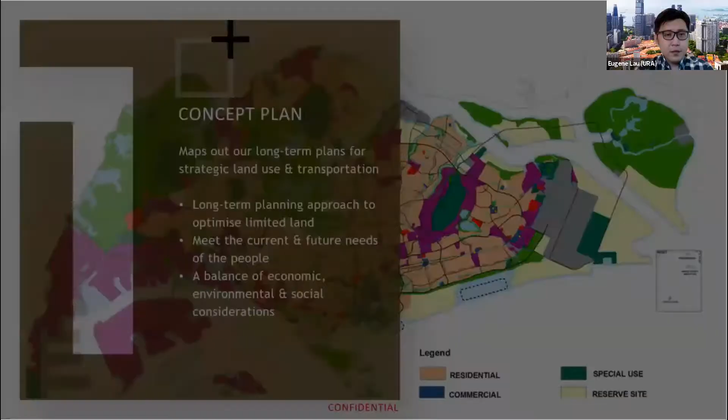First and foremost, the concept plan. Through many years of careful planning and execution, we have been able to seek out new solutions to address our limited land and physical challenges. The first process we use is called the concept plan, which is a long-term and very strategic forward-looking plan that plans almost 40 to 50 years ahead of the horizon.

We review this every 10 years. If you look at the plan itself, you'll see that the colors on the plan, compared to the master plan for those familiar with that, are actually not that multicolored. It only focuses on main colors like purple for industry, beige for residential development, green for nature reserves, and blue for commercial.

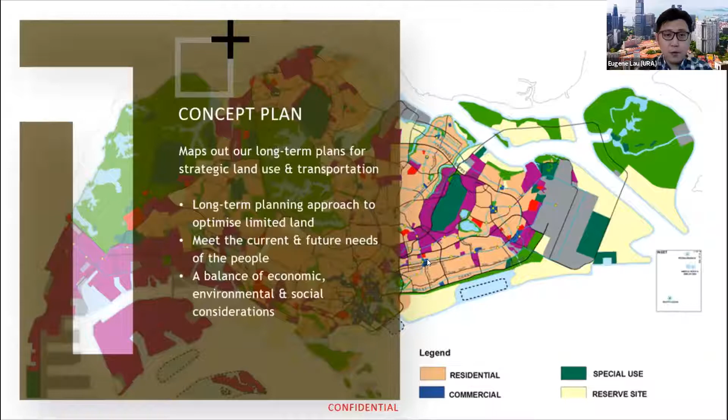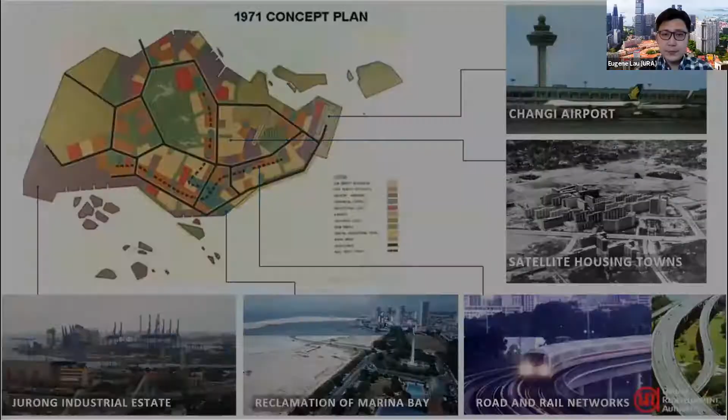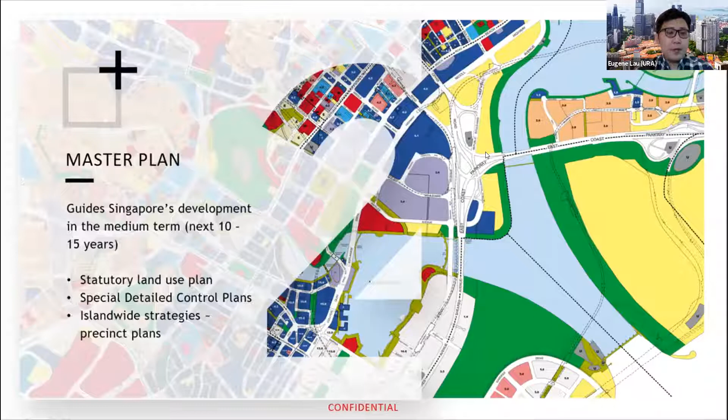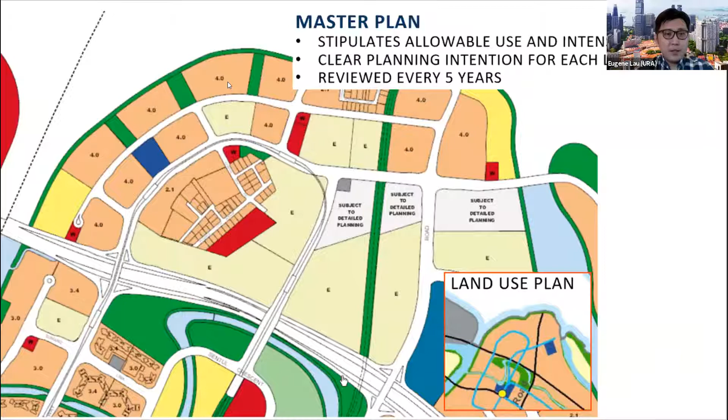I've zoomed in even further into an area in Punggol, in the northeast of Singapore. On the master plan, there are numbers we call the plot ratio, or in other countries, the FAR. This helps developers understand our guidelines clearly, and it's fully transparent. The numbers stipulate the intensity that can be built on the parcel, and the colors stipulate the type of land use allowed within the parcel.

Every 5 years, we review the master plan. We do a massive engagement exercise with stakeholders, then hold an exhibition, and gazette it after.

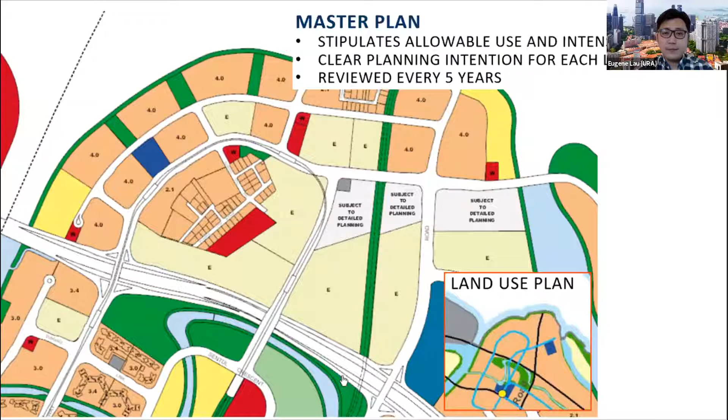Last but not least, planning itself is a multi-agency approach. Through the whole planning and implementation process, from the concept plan to the master plan and then to land sales, we have to work with many different agencies, including SLA, JTC, HDB, and so on. This integrated planning approach helps us obtain buy-in and cooperation from many different agencies, because URA alone cannot do everything to make plans realized.

Next, the urban design plan. What exactly is an urban design plan? I get this question very often. In summary, the urban design plan is an even further zoom-in on the planning work we do, focusing on layers like building form, building height plan, public space allocation, the green and blue network meaning the allocation of water bodies and parks, and pedestrian connectivity.

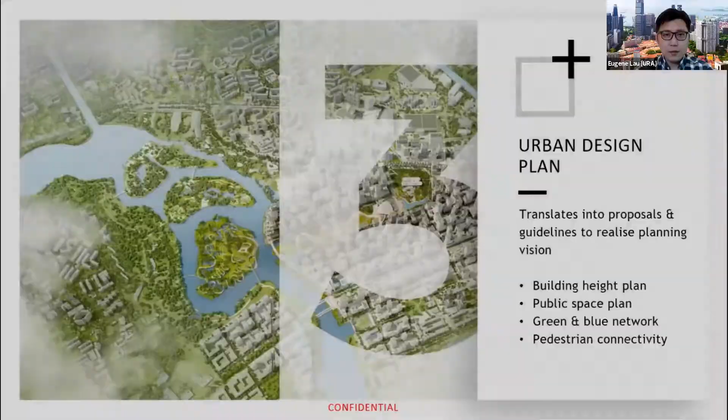Last but not least, design review of developments. URA itself is the planning authority of Singapore, a statutory board, and therefore we review submissions that come into us for approval.

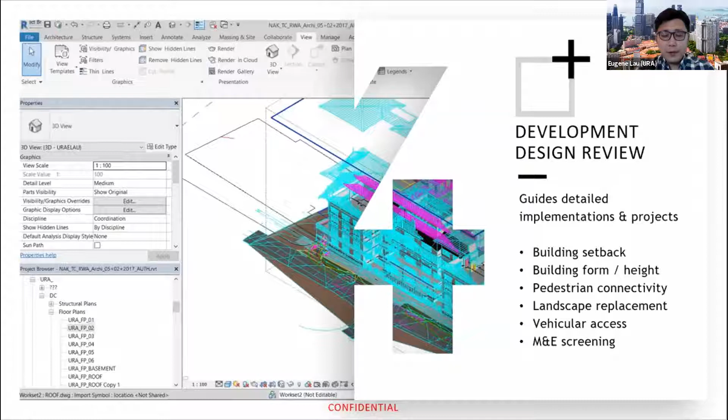In the past, we used to do so using 2D and 3D submissions, like CAD plans, and even 3D submissions done in various formats like SketchUp. But nowadays, we are moving forward to the submission of Building Information Model, BIM files, and we now use that for our design review because it's more efficient to work with developers reviewing files that they can also use for construction later on.

URA also sells land for the state. In fact, we are not the only statutory board that does so. HDB also does it, along with JTC.

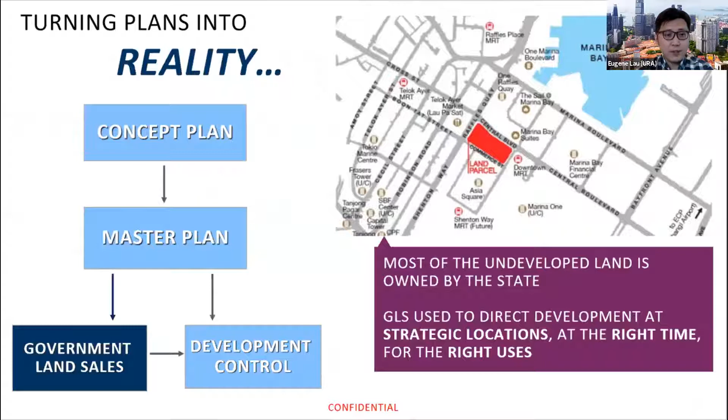With development control, there are very clear, transparent guidelines so that developers who want to build something on a piece of land know that there are certain requirements they have to adhere to, like building setback or floor-to-floor height control. So you cannot just build whatever you want on a piece of land, even if you have bid for it and won it.

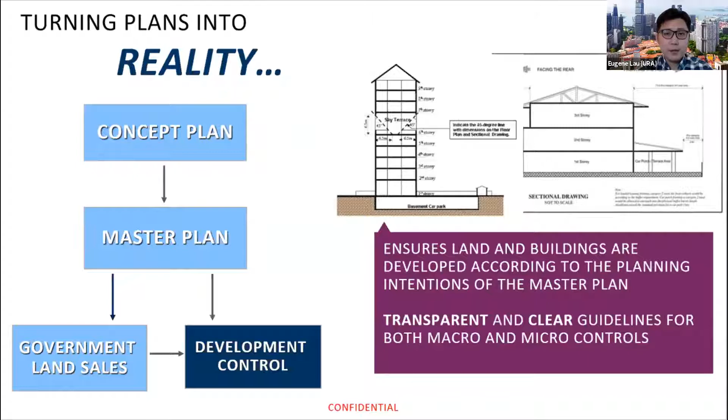So what is urban design? Urban design plays a very important part in the sculpting of the city. I often say urban design is essentially an art and a science, because it's not just design—it's quantifiable design.

We create memorable places for people. For example, as a Singaporean, if you go down to Gardens by the Bay and spend a day there with your family, it's a memorable day for you, and you remember the moments spent at the bay itself, like Countdown or National Day Parade.

Sculpting the urban form of the city: if you've been to Marina Bay, you realize there's a whole array of tall skyscrapers surrounding lower buildings around the bay, so that when you walk around, you do not feel too imposed upon by the skyscrapers looking down at you.

Activating the spaces between them—I'm referring to public spaces like Gardens by the Bay, and even the promenade around the bay. It's important to have all this breathing space in between buildings.

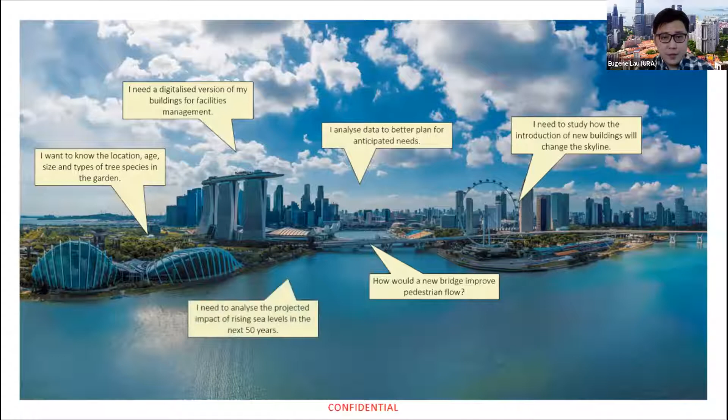So in order to ensure efficient design, we have resorted to building a digital twin of Singapore. Many agencies have done so, including SLA, which has built a digital twin of Singapore, and URA has also done another version that we will share more information on later. This is important because with the rapid evolution of technology, planners need all this data, whether 2D or 3D, to help us plan better and plan smarter.

In the next few segments, I will share with you some case studies of how URA utilizes digital twin technology to improve our planning efforts.

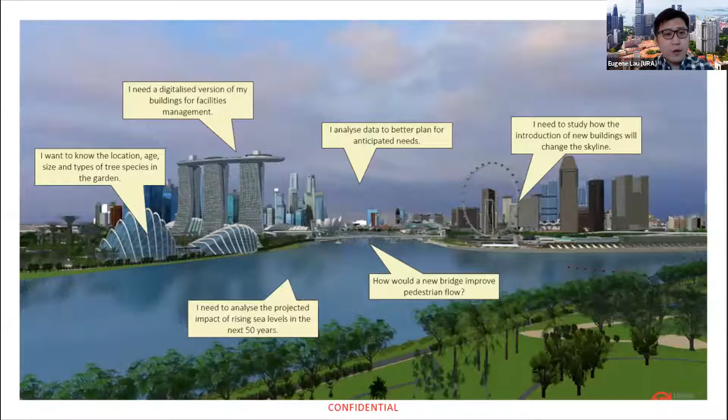Digital data within URA exists in many different formats: 2D and 3D, GIS data and 3D data. Nowadays the line between both is starting to blur, because we have 3D GIS data as well. What I'm trying to highlight is that all this data works hand in hand—whether internal data within URA, external data from external parties, or 3D data. More often than not, to have more complex simulations and analytics, you need to overlay all these different layers in order to get interesting outcomes.

As I just highlighted, there are many different processes in the planning process of URA. The next segment I'm going to touch on relates to the concept plan, master plan, and the urban design process. Firstly, the data we use in URA comes in different kinds of fidelity that I would like to call the level of detail.

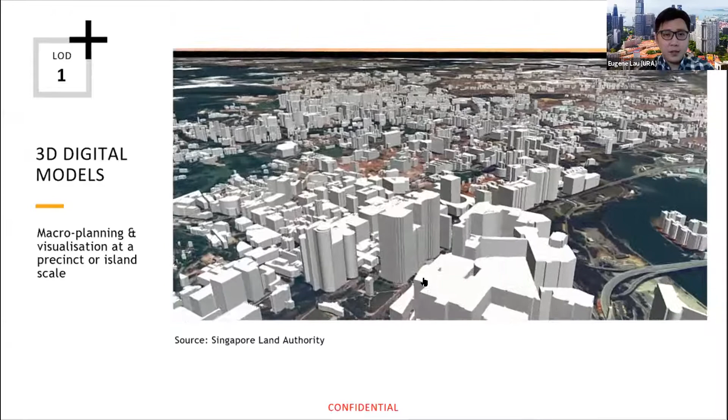For LOD1, this actually belongs to SLA. They do share their data with us, which is very useful, because more often than not, we do planning and require different fidelities of 3D data. We do not always need high resolution 3D data, and this resolution is actually very useful because it's lightweight and easily navigable.

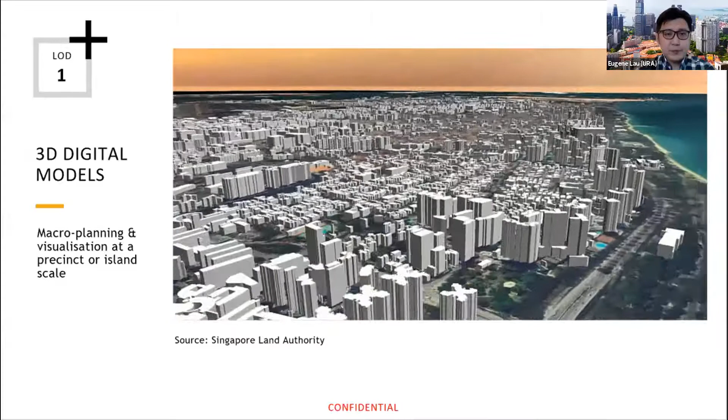This LOD2 data set is also obtained from SLA, who shared it with us. We use this with an internal software that we have in URA called the 3D Urban Planner Pro for simulation work. So what I'm doing over here is trying to simulate new developments within Marina Bay.

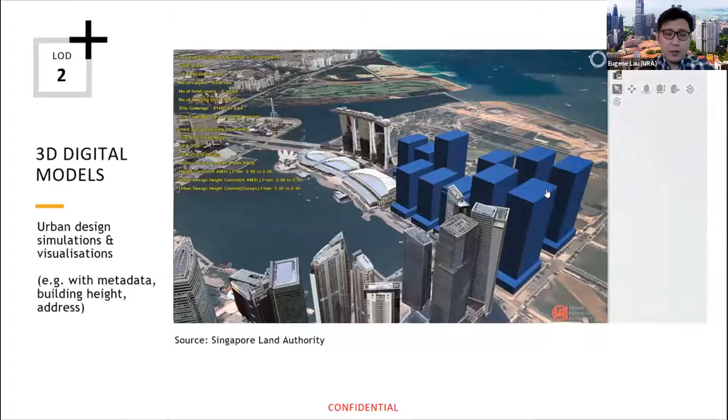Let's say in the future I have new building blocks like this, the ones colored in blue. I would like to check how this building block would impact, for example, the urban form of Marina Bay, and how it would change the view along a road in Marina Bay to, let's say, MBS or to the flyer.

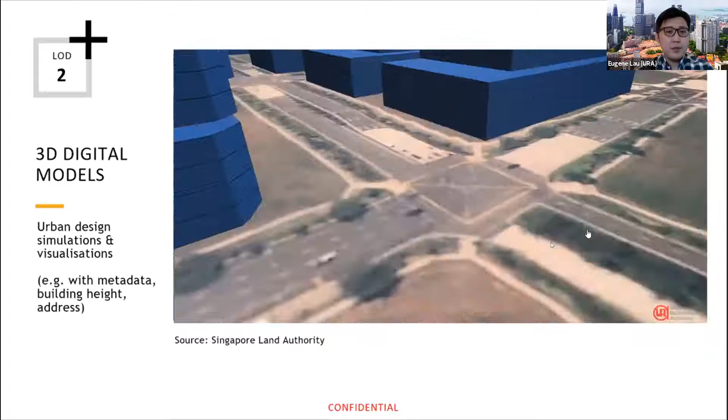You can see that I can even fly down to the street level to ensure that there is a clear view corridor along, let's say, I think this should be Bayfront Avenue, yep, that you can see MBS, even with these new developments.

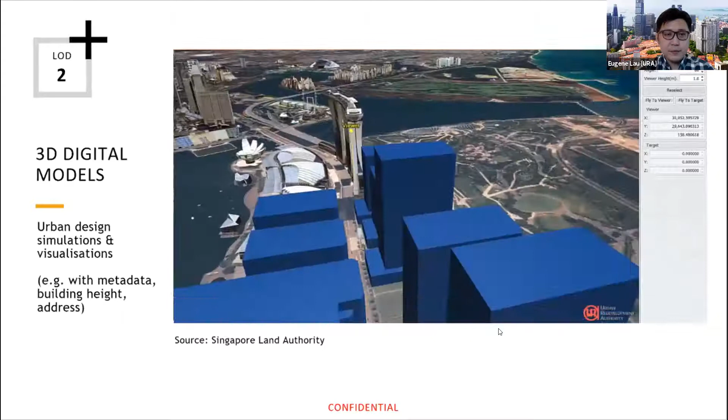The third type of model that we have in URA are the LOD3 models, which we have commissioned a 3D modeler to build over a couple of years. This is slightly higher in fidelity. You can see the level of detail that we've included in the data set.

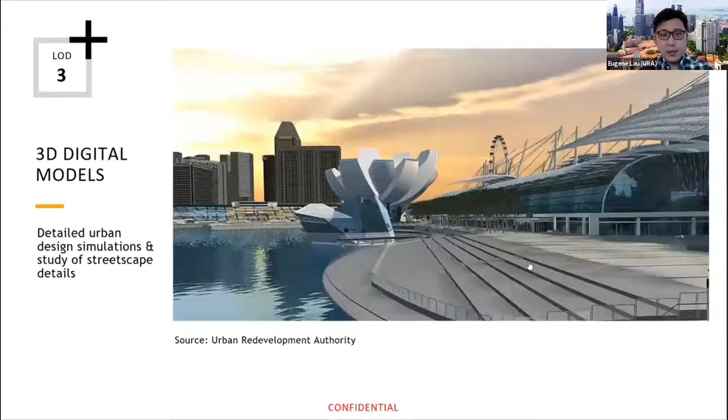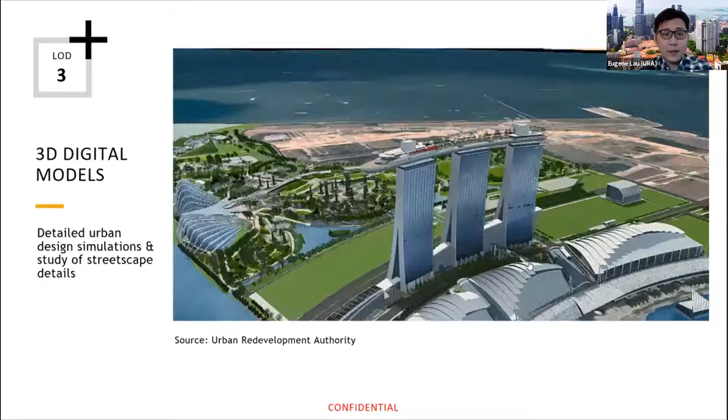This is because, like I emphasized, we need different types of fidelity of models for different purposes. This quality of models is very useful when you want to do 3D rendering, artist impressions, fly-throughs for exhibitions and for engaging the public. You can see that even the roof garden of MBS itself is modeled with the deck chairs, swimming pools and trees as well. So, pretty detailed.

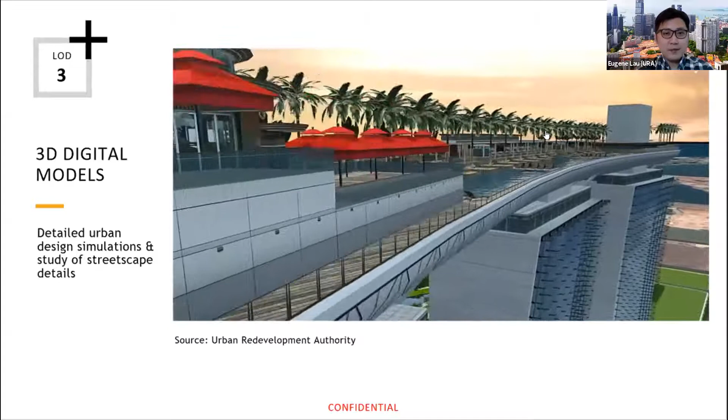So, we have 3D models, but the most important thing about the data set is updating it to ensure that it is accurate. How do we do that? There are a couple of ways that we can explore doing that.

Of course, like I mentioned, we are receiving a lot of BIM file submissions from architects and developers. We are really in the process of trying to convert these into a suitable format that we can import into our database, so that it serves as a sustainable source for updating the database itself.

Another method that we're trying to explore is the use of drones and photogrammetry. In a recent government land sales site that we launched, at Jalan Anak Bukit, we realized that we actually did not have an updated model of the area. So what we did was use drones to fly around the area and perform photogrammetry mapping.

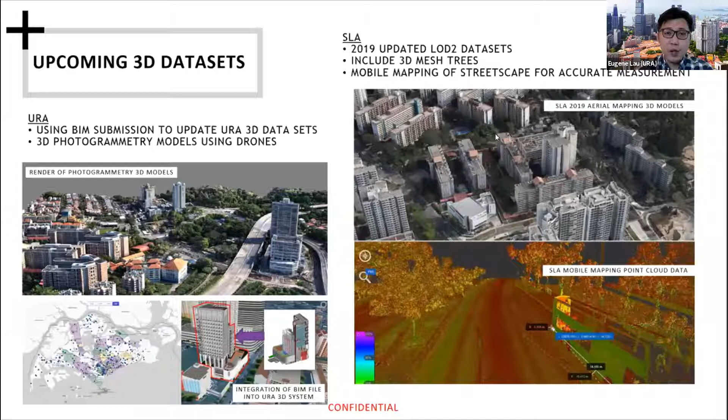This would be data that was recently scanned in 2019, and we are looking forward to using this type of data because it is updated and includes vegetation data as well, which is often very useful for our planning work.

In URA, we have also started our own drone team, led by myself and a couple of other colleagues, and we have registered ourselves with CAAS. This is because we feel it's important to build up our competency in maneuvering drones, as they are a very useful technology for planning as we move forward into the new era of planning — be it taking photos and videos, or for use in photogrammetry modeling.

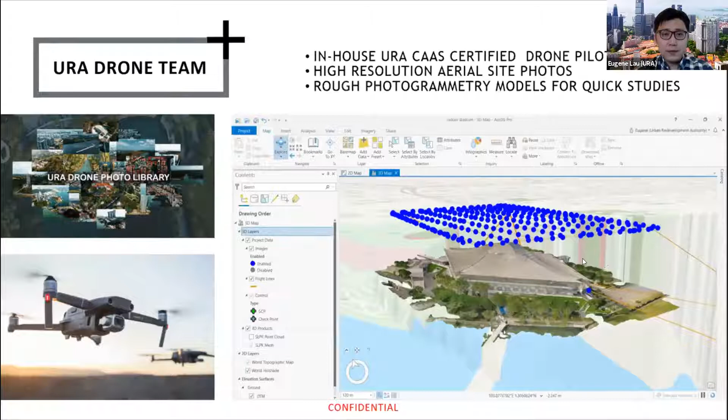So this is the Singapore Indoor Stadium. This was actually a very quick job — we went on site, spent 20 minutes, flew the drone, and came back with this output, which honestly is not a very nice model, but this was just the first round of scan, done in 20 minutes. Imagine the amount of scanning we can actually do to map small localized areas in order to update our database.

In URA, when we do planning, we use a myriad of software. There's no one software that has all the solutions for you. For different purposes, we actually have to rely on different software.

For example, for modeling, we still use SketchUp and Rhino, but at the same time we are trying to push architects and planners in URA to move towards a more GIS-centric way of doing 3D modeling, using ArcGIS Pro and City Engine.

For analytics, we also use our own internal proprietary software called 3D Planner Pro, which is a 3D GIS software. At the same time, we're also trying to build out our competency in ArcGIS Pro and City Engine so that the planners in URA can do more complex simulations.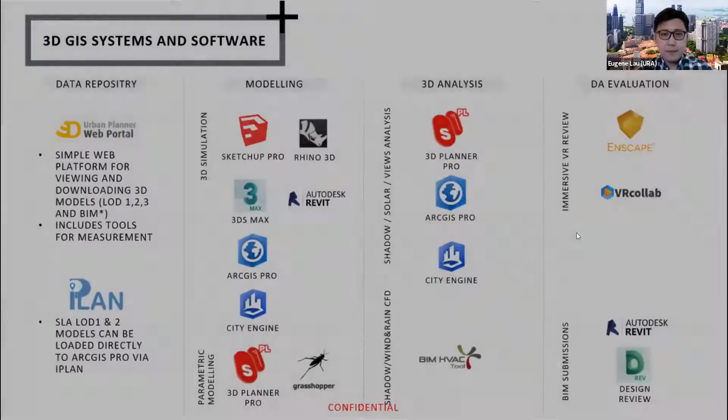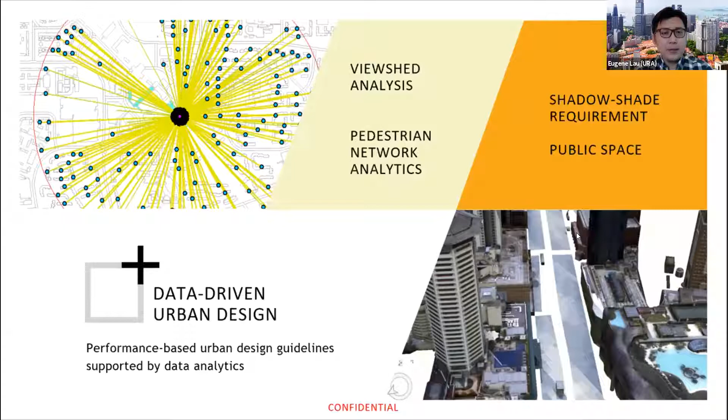The importance of data-driven urban design will be highlighted in the next few examples. I will share with you how we do data-driven simulation with different types of software. The important thing is that even though we use different software, the data set we use is actually the same, but it's very important to ensure it's interoperable so we can use it no matter what software we want to do the simulation in.

First and foremost, the importance of views. This image you see is actually on the south of Singapore near Sentosa, and this hilly area on the map is the southern ridges. In the past, we used to safeguard important views from the ridge itself to the waterfront by using Pythagoras theorem.

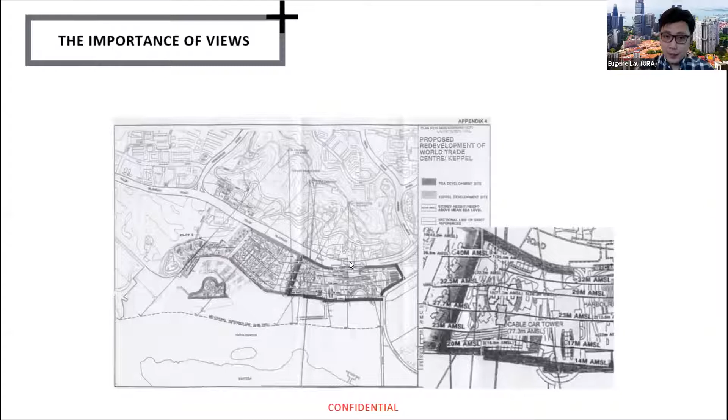Believe it or not, we used Pythagoras theorem to draw all these corridors, trying to second guess how the view would be like. Therefore, buildings in front of the ridge could not be of a certain height in order not to block the view.

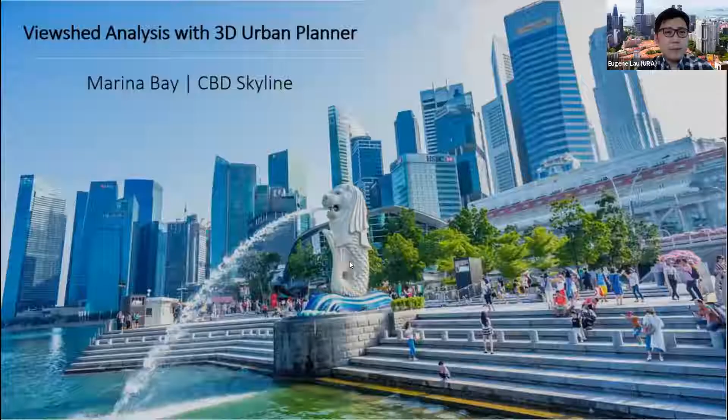But now with digital models, software and systems, we can actually do actual validation of view corridor simulation very simply. One example would be the use of 3D Urban Planner, a proprietary software we have in URA.

In this example, imagine at Merlion Park, if the development here is to be redeveloped, we want to ensure that the view of the existing CBD skyline is not blocked, because if it's just like this, it's going to be a nightmare. When you stand at Merlion Park, you can no longer see the beautiful skyline behind Fullerton. So instead of allowing developers to come in and build as high as they want to maximize floor area, we do simulations like this to check the viewshed.

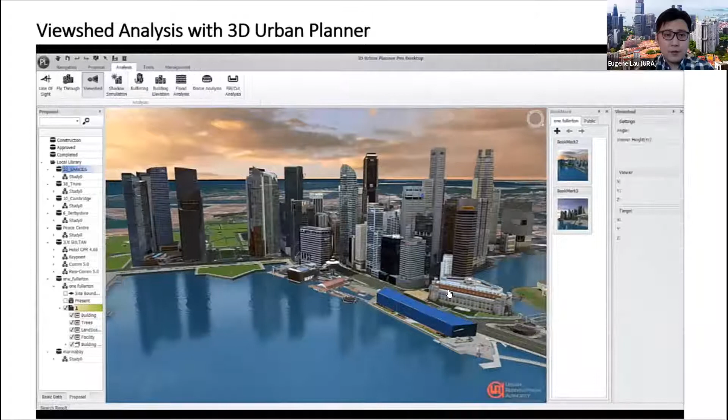The areas in red represent the buildings that you cannot see, that will be blocked by the building, and the areas in green represent the area that you can still see. We then do a few iterations to find the optimal height of the building to ensure that key buildings, like Maybank or Ocean Financial Center, can still be seen from Merlion Park.

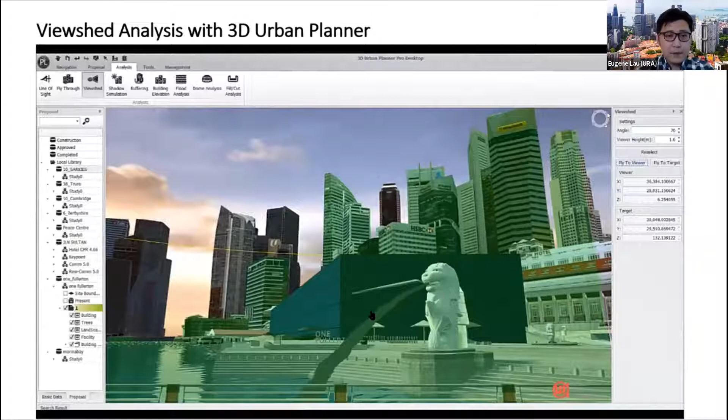Climate change and global warming is very real, an issue we all have to address, especially as you can see the rain has been pouring the past few days, and it's just been ponding quite badly.

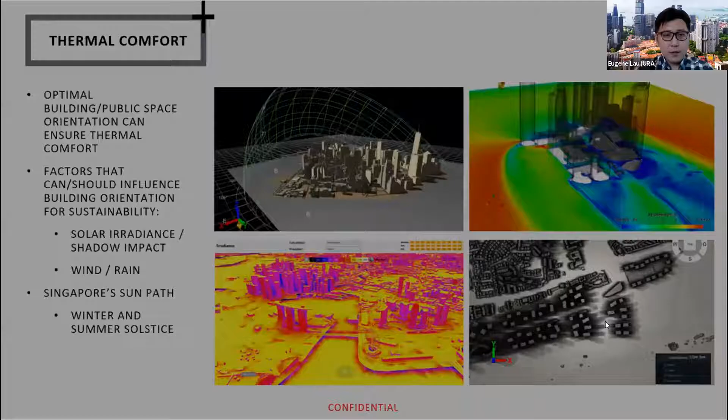On the topic of shade simulation, I would use Orchard Road as an example, and the software we have used is actually ArcGIS Pro.

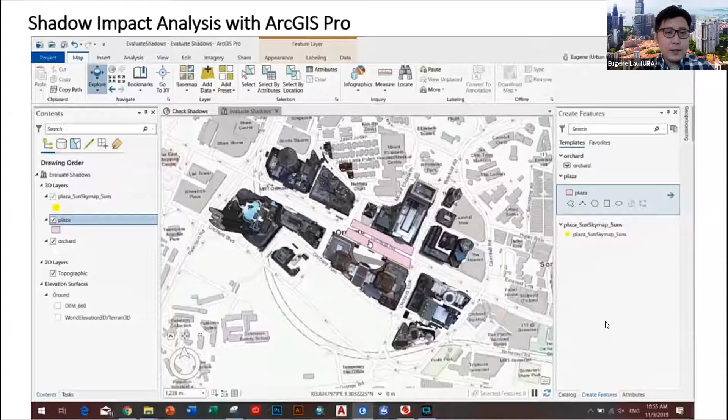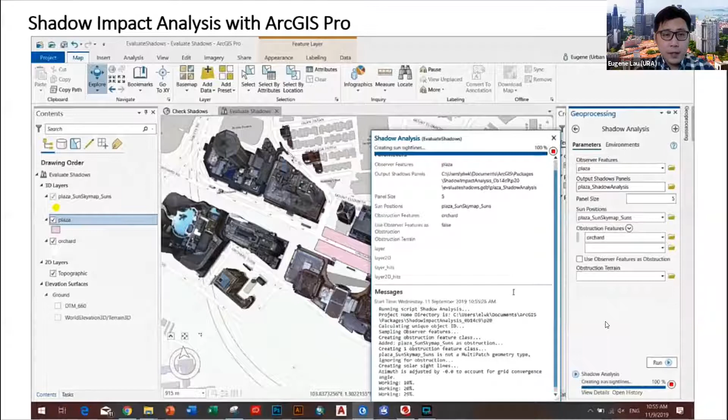If you go down to Orchard Road nowadays and compare it to the past 10 years, you realize it's rather bare. The trees have been cut because some are aging, some are sick, and NParks have come in to cut down the trees so they will not fall. Over time, the trees will diminish, and the amount of shade we once received in Orchard Road will also diminish.

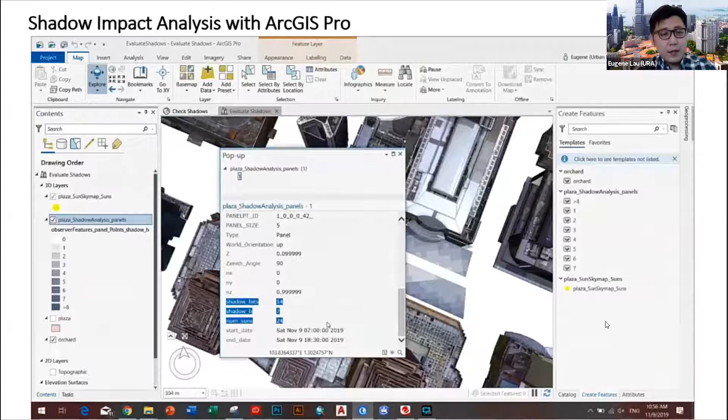So if we're going to plan for the Orchard pedestrian mall and want to ensure shade is still provided at certain areas, we can do a shadow simulation using ArcGIS Pro. This shadow analysis doesn't just tell you where shadows are cast, but informs you of the accumulation of shadows at certain areas, so you know which areas receive the most shade over a period of time.

Last but not least, I'd like to introduce the concept of procedural modeling, done using CityEngine. The topic we're talking about is the policy we call the landscape replacement area, part of the LUSH guideline. This policy stipulates that developers have to replace the site area they're building on by using vertical greenery within the new development itself. This can come in the form of vertical green walls, sky terraces, roof gardens, and many different kinds of plug-and-play combinations.

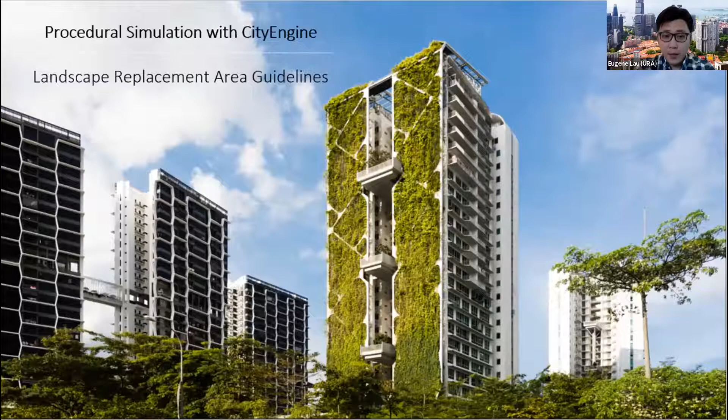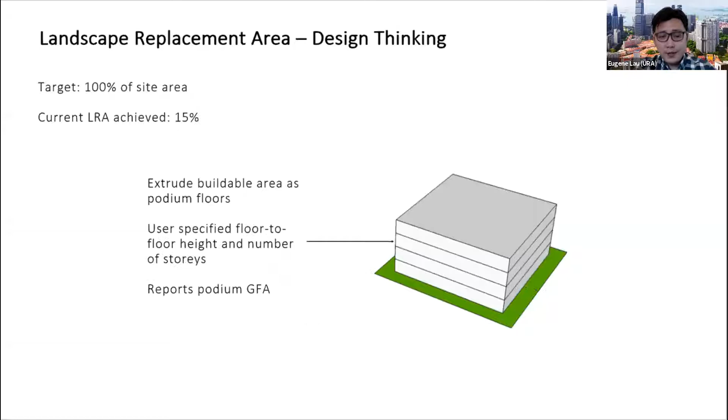So when we do the simulation internally within URA, we have to ensure we're asking for the right things from developers, and we do so by using design thinking. This is what architects usually do - we do manual simulation like this.

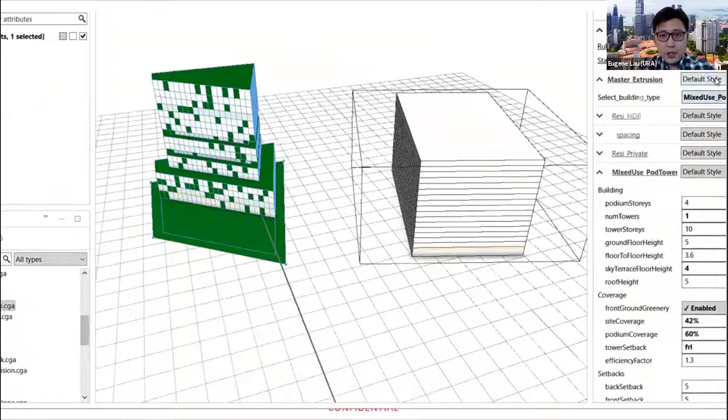But with CityEngine itself, we can use software to do the simulation, because this is coded and procedural. So what I'm doing is just dragging and dropping the rule into the parcel, the polygon, and changing the land use. Once you change the land use, immediately you see the building form being generated, and you can see the parameters you can tweak on the right-hand side in the inspector panel.

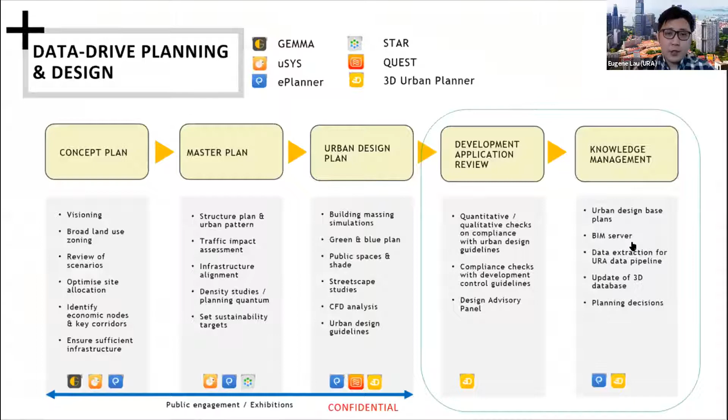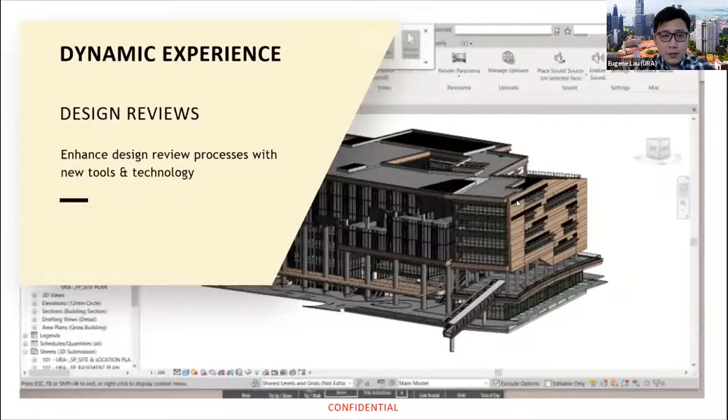The last portion I'm going to touch on is the design review portion and knowledge management. When we deal with BIM files, we often face the issue of the file being too big, too heavy. At the beginning, we tried to use native BIM to review the files and the design, but later we realized it's quite impossible.

We have to resort to plugins, like Enscape, in order to convert the BIM file into something more aesthetically pleasing for design reviews and easier to navigate within the buildings. It's almost like playing a first-person shooter game.

In URA, we also have a room we call the white room. This is basically a multi-purpose room that has a curved wall. We have the software I mentioned, the 3D urban planner, that can be projected on this curved wall for a more immersive design review experience.

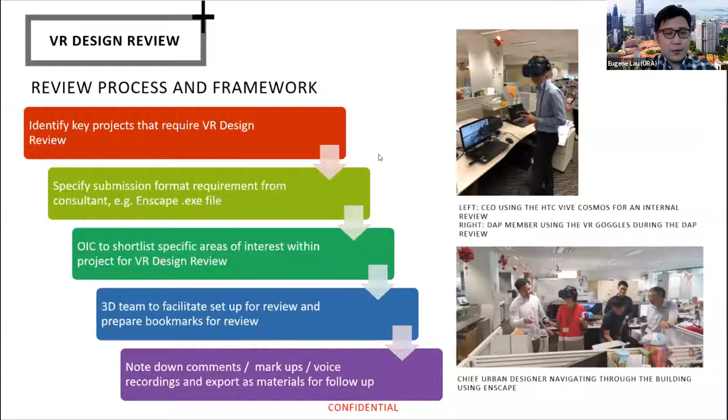We have also started to use VR. Here you can see our CEO and our chief urban designer using VR goggles to do design review of a new development. It's very important to have a proper workflow and process when using VR, because you can't be immersed in the VR environment for too long - you start to feel sick.

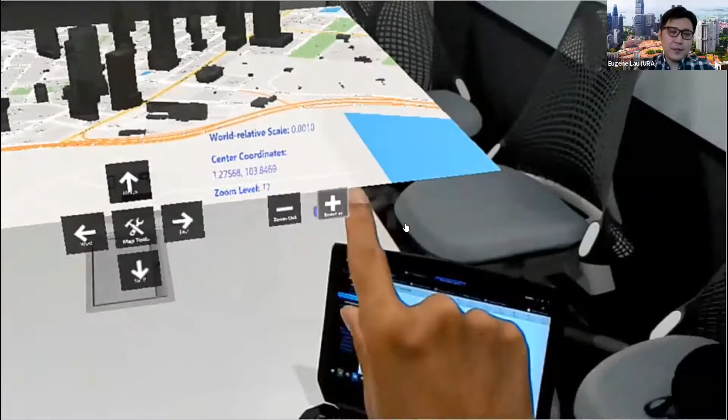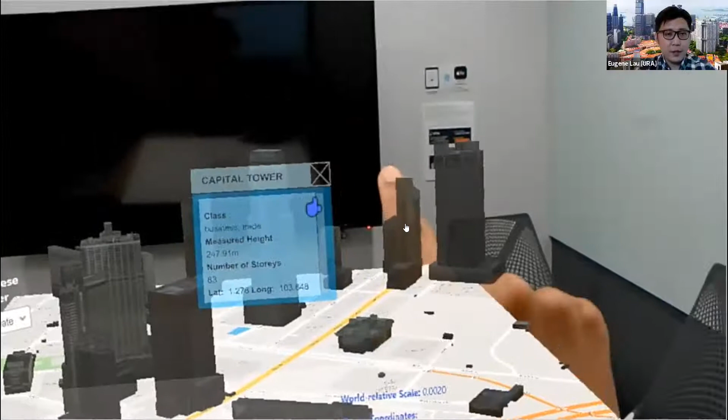This next image you see is the use of Hololens that we have tried to toy around with, with the 3D data set we have. We've coded it and included some gesture-controlled commands - you can see I'm clicking my finger and trying to open the buildings and zoom into street level.

If you've been to the URA Center recently, before COVID hit, you realize that in 2019 we actually have a new Islandwide model. This was done using 3D printing, and it was only possible because we have a robust dataset of 3D models combined from different parties - HDB, SLA, URA, and even JTC. We combined everything and 3D printed it, which saved us a lot of time and effort.

And with the GIS layers we have within URA, we can easily export the layers and convert them into overlays as part of the projection mapping show.